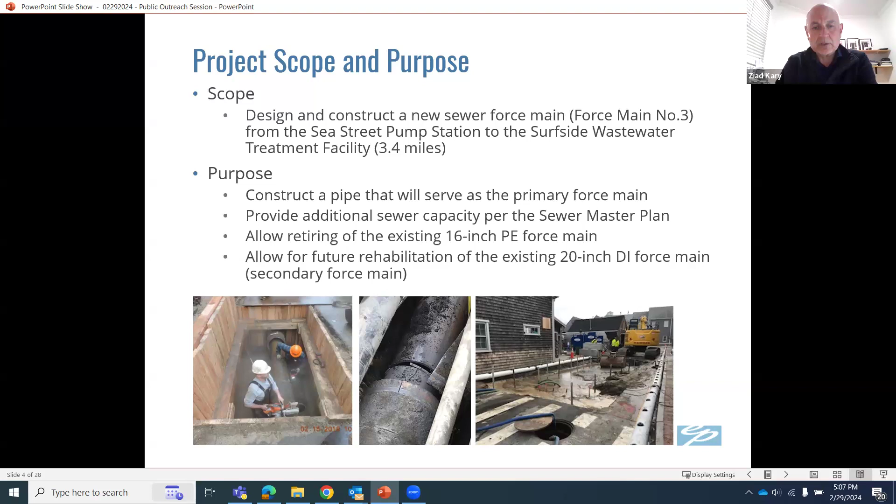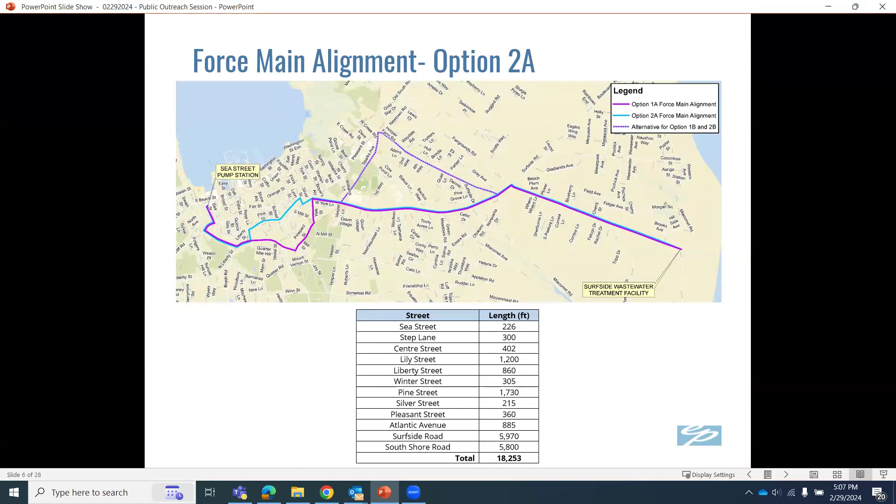So the alignment - we did an alternative analysis. We worked with the town and the owner's project manager, and we looked into various routes along the alignment. The intent was always to connect point A to point B - point A being the Sea Street pumping station, and point B the wastewater treatment plant on South Shore Road.

So there are multiple ways you could connect the dots in between, but the intent was to maximize the effort and replace all aging infrastructure along the alignment. We considered the shortest alignment, and of course we looked at the economics of it too.

Along the chosen route, which started at Sea Street and went up Step Lane, took a right on Centre, Lily Street, Liberty Street, and then Winter, Pine. We crossed Main Street, and then we get into Pine, Silver, Pleasant, Atlantic. It's all listed in that table below here.

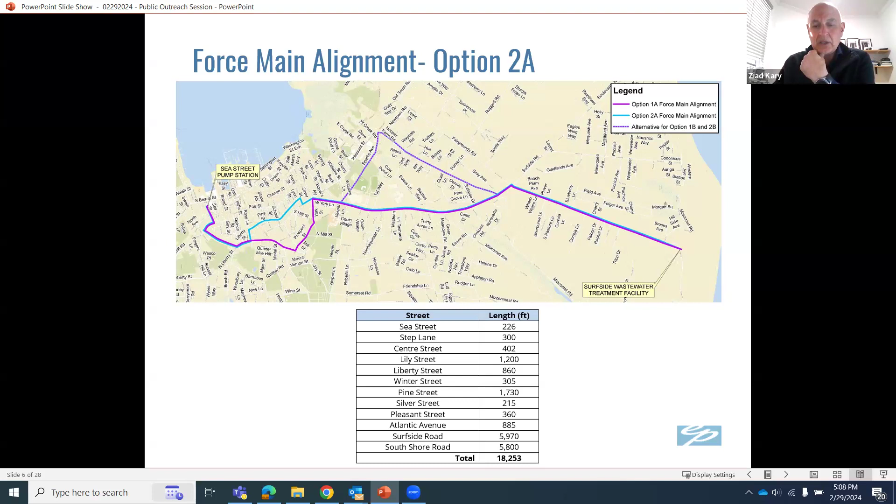But the Board of Selectmen and everybody on board during the alternative analyses portion decided to go with this option because it made the most sense. It took advantage of aging infrastructure along the way, and it was feasible and economical compared to the other ones. Again, it was the shortest route from point A to point B. There's no impact to wetlands or anything like that.

We also had to take into consideration the existing 20-inch force main, and we wanted to provide a way to cross-connect the new force main to the old one to be able to take a segment or segments of that force main for operation and maintenance purposes.

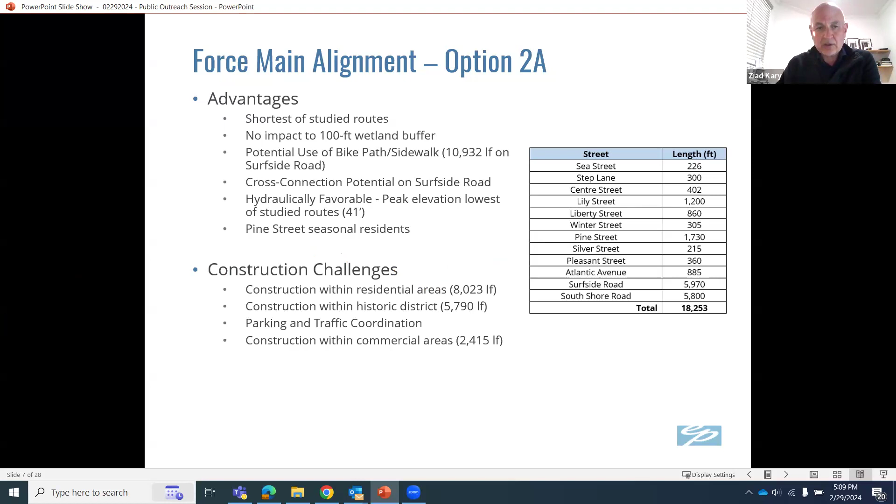Every single route presented its own set of challenges, but the Board of Selectmen approved this back in 2021, and we proceeded with this design, and here we are in year 2 of construction. Again, as I mentioned early on, the intent was to address aging infrastructure along the way, primarily water mains, gravity sewer, some drainage along the way that needed to be upgraded if it was in the way of the force main, but primarily to take care of the water and wastewater infrastructure.

So in summary, what was completed to date, this is the entire route from the Sea Street pump station along the streets that I just mentioned, all the way to the wastewater treatment plant. There's approximately 20,000 linear feet.

Anything highlighted in lime green has been completed, and what's left is the blue portion. On the right side where my mouse is hovering, it's the connection at the wastewater treatment plant on South Shore Road. And then what's left here down below is Liberty Street, Winter, crossing Main, and then Pine and Silver Street, adjacent to the parking lot on Silver Street.

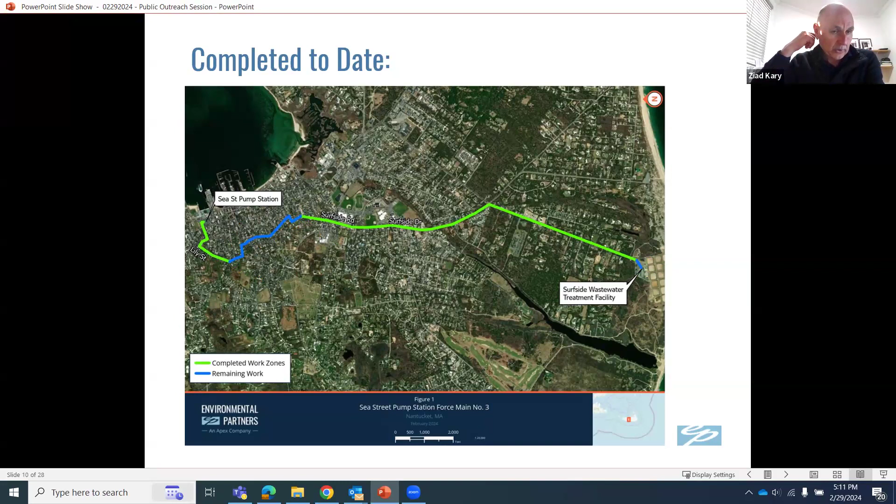The force main itself was designed to be a combination 20-inch to 24-inch. It switches to 24-inch beyond the Surfside sewer pumping station, the one that just recently completed, and it's made of robust schedule DR18 PVC pipe.

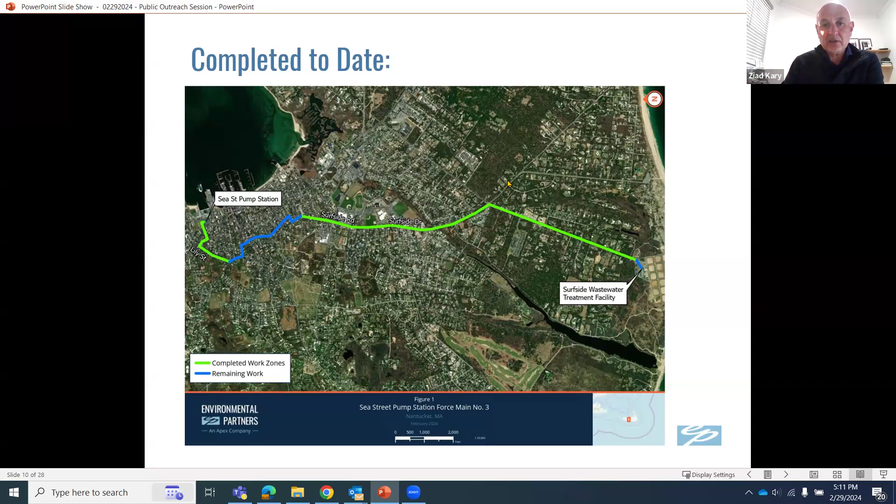Again, in summary here, the 24-inch sewer force main from Surfside to the treatment plant is 100% complete. That is really half of Surfside Road and all of South Shore Road. About 62% of the 20-inch has been completed to date, from Sea Street, Step Lane, Centre, Lily, and then Atlantic Ave and Surfside on the opposite side of the island. And here we are today on Lily Street, on Liberty Street, completing that remainder of the sewer force main.

The 70% of the valves and the access control structures have been put in place, and 40% of the gravity sewer and the water main. It seems like a lot's been done. The contractor's been very diligent about doing this work, considering the short construction duration here.

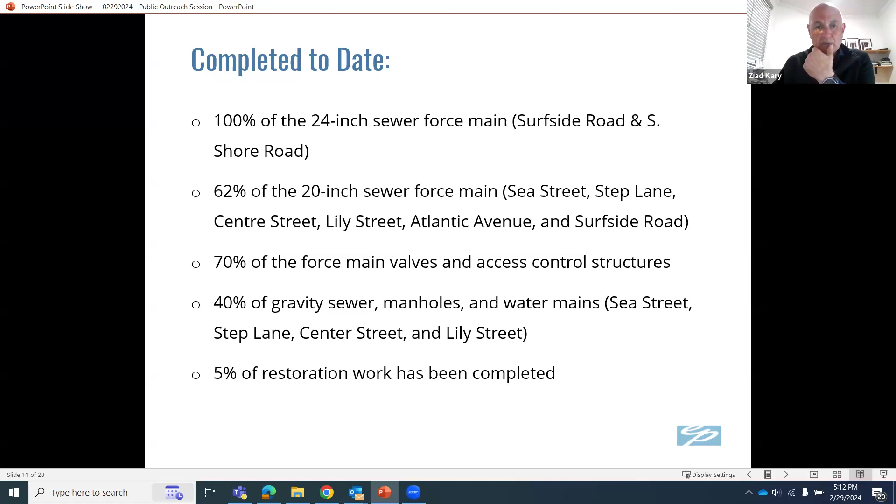Because obviously we can't work in the summertime, and then we come back in mid-September, and then we work all the way through Memorial Day. Restoration is a very large piece of this project. The pipeline is nothing easy about it, but then of course the restoration is going to be time consuming. And to date, we only have about maybe less than 5% of the restoration piece completed, meaning paving, sidewalk, curbing, brickwork, cobblestone, Belgian block, and any loam and seed that is required along the alignment.

So the winter spring construction on Liberty Street, basically what we have, we started about a week ago on the 22nd of February, and it's going through May 31st, 2024. By May 31st, we intend to be out of the alignment, out of the roadway, complete with the pipeline, and we're going to do temporary restoration before we come back in the fall, in September 2024.

In summary, we have about 875 feet of 20-inch PVC sewer on Liberty. A lot of it's going to be deep. It's going to be time consuming, and it could be slow going at times, but we're going to make every effort to get to that point, hopefully by the end of construction season. There's about 650 feet of PVC gravity sewer and associated services along the way, left and right of the roadway, and somewhere around 875 linear feet of 6-inch DI water main.

Today, you see that the contractor is stringing the bypass, a water main bypass. That's the first thing that goes on the road there, and they rip out the old water main, put in a new one, test it, commission it, and then we'll remove the bypass when it's complete.

Typical working hours are usually between 7 a.m. and 5 p.m. Oftentimes, if we run into trouble, we tend to work a little bit late. Now that the days are getting longer, sometimes the crew loses a day due to weather, whether it's snow, rain, or maybe the boats are not running. So sometimes they're trying to make it up during the week, but oftentimes you see that the contractor's working between 7 and 5 p.m.

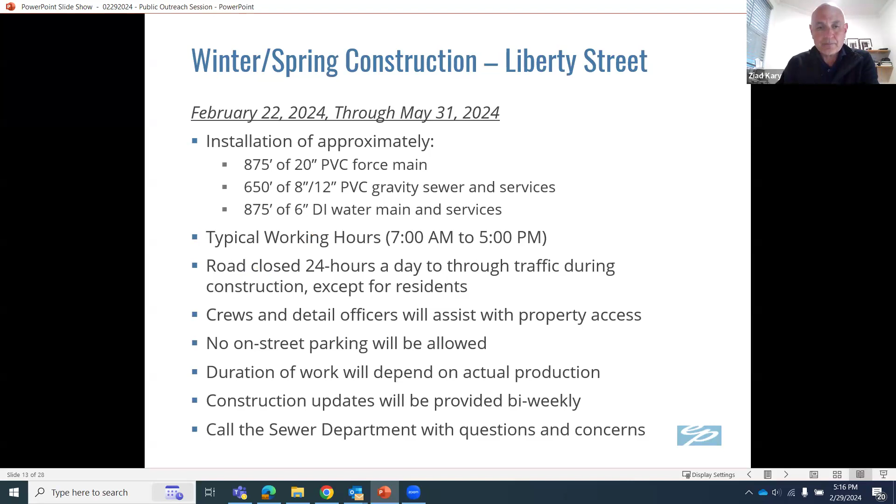Again, this is from Thursday the 22nd. The approximate duration of this will be about 8 weeks, hopefully a little bit less than that, but let's plan on 8 weeks. This figure shows a 24-hour full closure except for residents. Again, construction hours are between 7 and 5 p.m.

As we did in the downtown piece, all the delivery trucks, whether it's propane or any heating deliveries, have always been coordinated. Now we know the drill, the suppliers know the drill. They'll contact us and then we'll make arrangements. Nobody was left off in all of downtown, and there'll be no different here moving forward.

So here's the number for the sewer department. If you have any questions, any complaints, any issues that need immediate assistance, it's extension 7800, and this will be posted also on the project website.

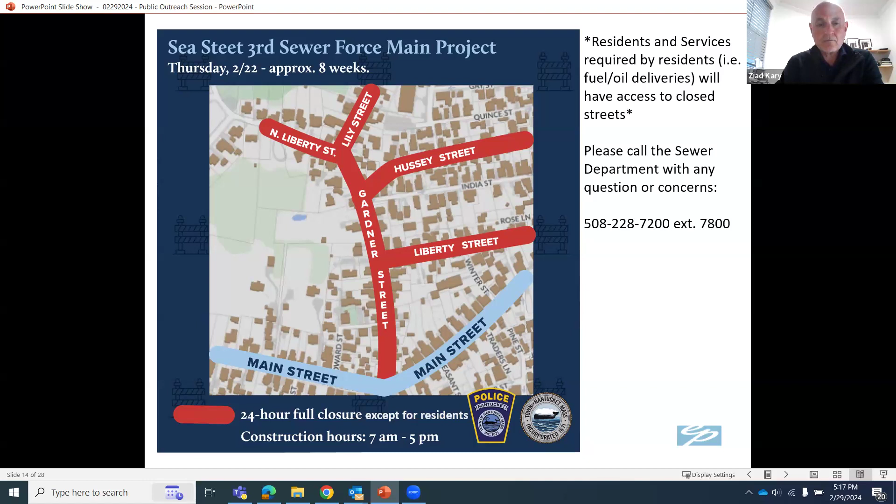This figure here shows, if you look at anything that's dashed here, represents the work area, which in this instance is on Liberty Street. Anything that is in lime green will be the traffic pattern, and the hashed area would be the road closure. So for example, if you live within this stretch and you can't really continue down on Liberty Street, you could come up and find your way around the work zone. If you live on this portion of Liberty Street and can't really get through there, you talk to the flagger, the policeman, or the crew members, and they'll let you go in the opposite direction to exit the work zone.

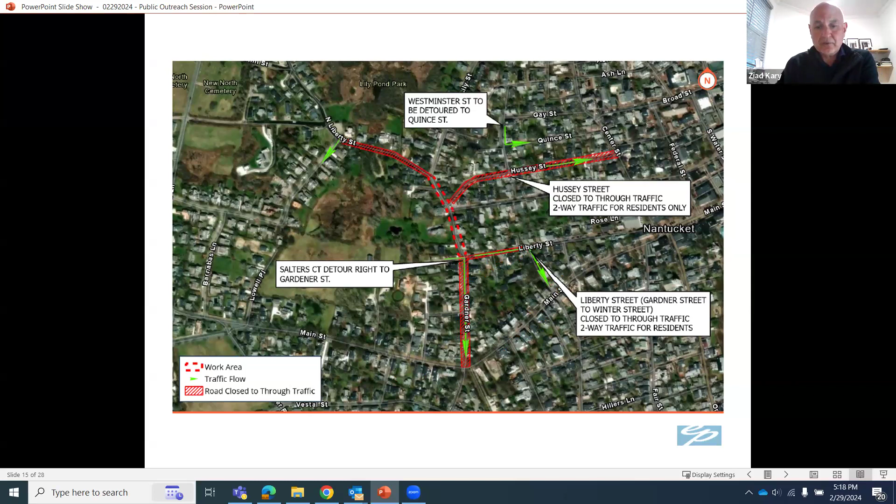There'll be plenty of construction signage. Like I said, people are on site 7 to 5 at a minimum, and you could feel free to roll your window down, talk to the crews, the flagmen, the policemen, and everybody's happy to assist.

Same thing, same condition, Liberty Street at Gardner and North Liberty at Woodbury Lane. The signs will be there, and then folks will be there to assist as well.

So the expectation is sometimes you're going to see people walking around doing some construction photographs and videos, and it's really nothing but to make sure that we're documenting existing conditions of surface features, foundations, walls, anything adjacent to the excavation, just to make sure that we're not making the situation any worse than it was. This is a requirement of the contract, and it will be documented and made available.

They will be installing some monitoring points, whether it's a crack gauge or a settlement point, to make sure that nothing is settling or moving as a result of construction. They'll be doing some layout and survey, painting the pavement, putting some PK nails, line and grade, that would help them assist the contractor with the installation of the pipeline and making sure that the pipe is installed in accordance with the contract document.

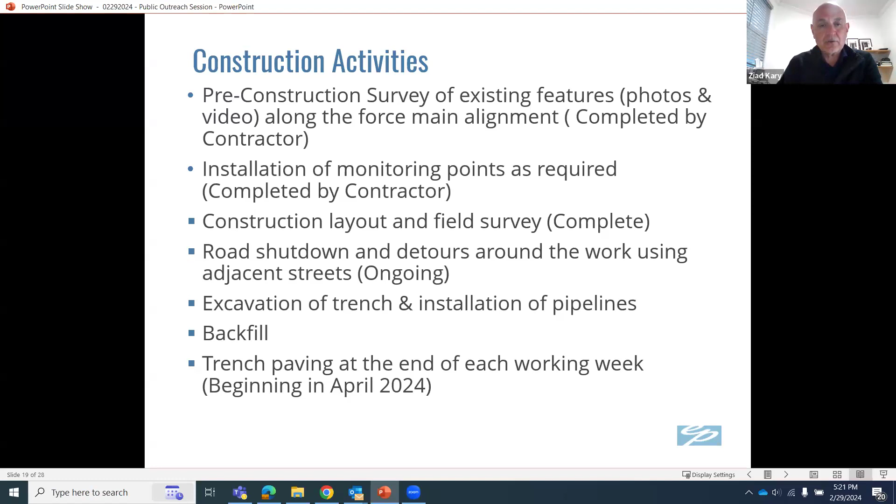We talked about the crack gauges and the monitors - this is what they look like. This is a crack gauge. Basically, if you have an existing crack in the foundation, this is just a sample photo. If you have a foundation wall, a brick wall, any surface feature adjacent to the excavation, we usually put a crack gauge on it to make sure that the construction is not impacting the crack in the foundation, an existing crack, or any movement for that matter.

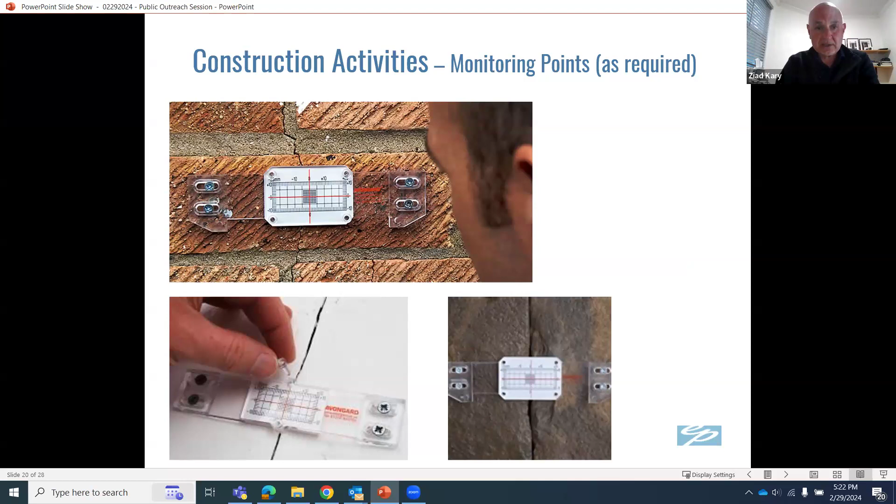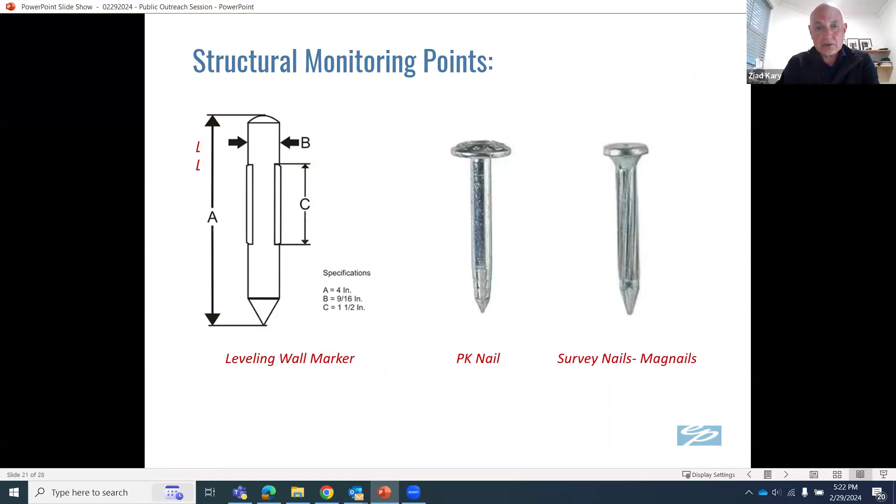Same thing with a PK nail that measures vertical displacement or movement of anything as a result of construction. Again, these instruments are intended to protect the homeowner and to make sure that there's no damage being done as a result of construction.

These photos have been taken from the Center Street project last year. Again, typical construction would be you rip up the pavement, remove any Belgian block, cobbles, or anything that may exist below the roadway. If the sidewalks are impacted, the brickwork would be removed and stacked, and so is the granite curbing.

This will be followed by trench excavation. Some of the pipeline is fairly deep, sometimes about 10 or 12 feet deep, so it requires a trench box and then some supported excavation.

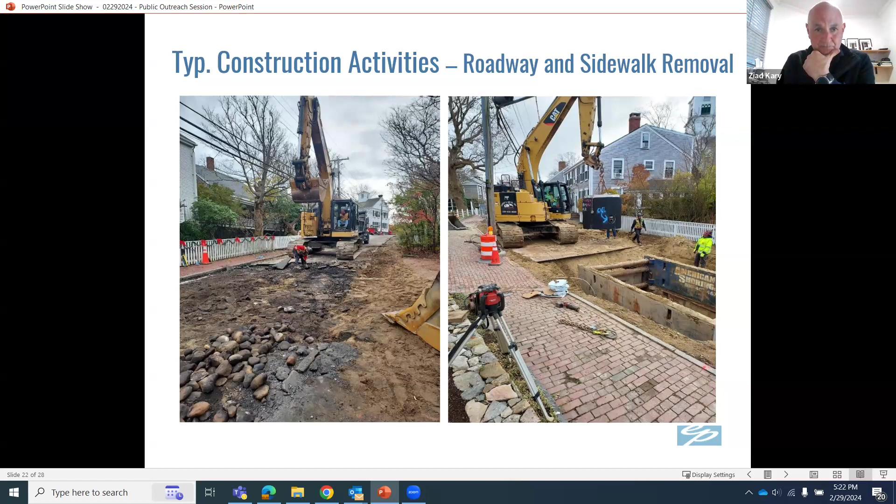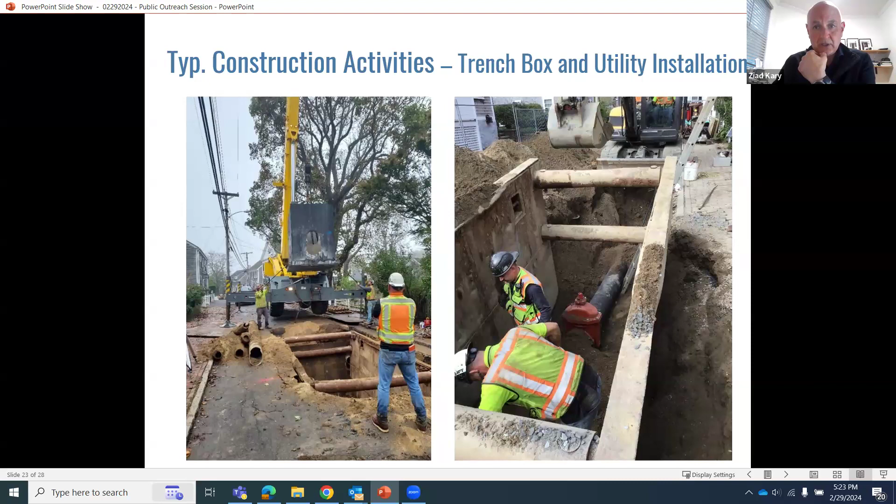This would be followed by pipeline construction. In this case, on the right, that's a water main replacement project along the way. And the photo on the left, you can see the old pipe is taken out of the ground. New pipe will be installed, with backfill and compaction.

This is the pipeline on the left side - that's the sewer force main on Surfside. There is a crushed stone envelope to protect the pipe, and then backfill, compaction, and paving. Again, the plant opens up in April this year, so we're not going to see any paving until April. But again, before we leave the site by Memorial Day, everything will be paved, temporary paved.

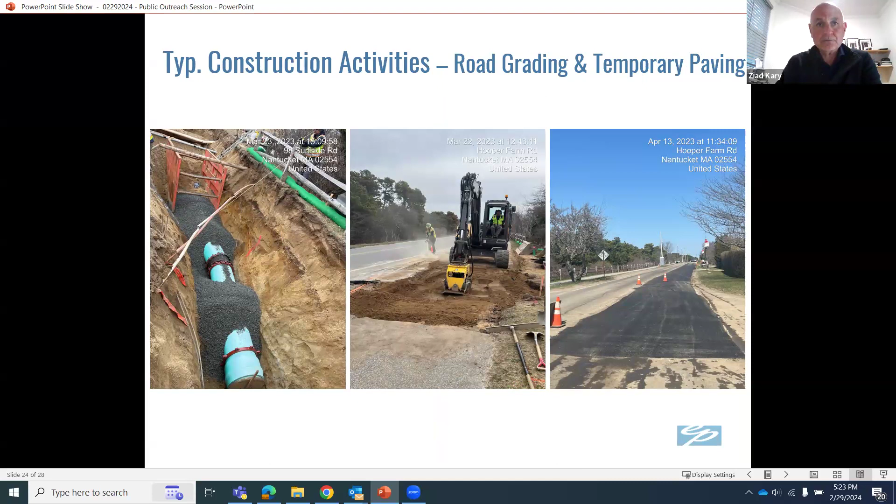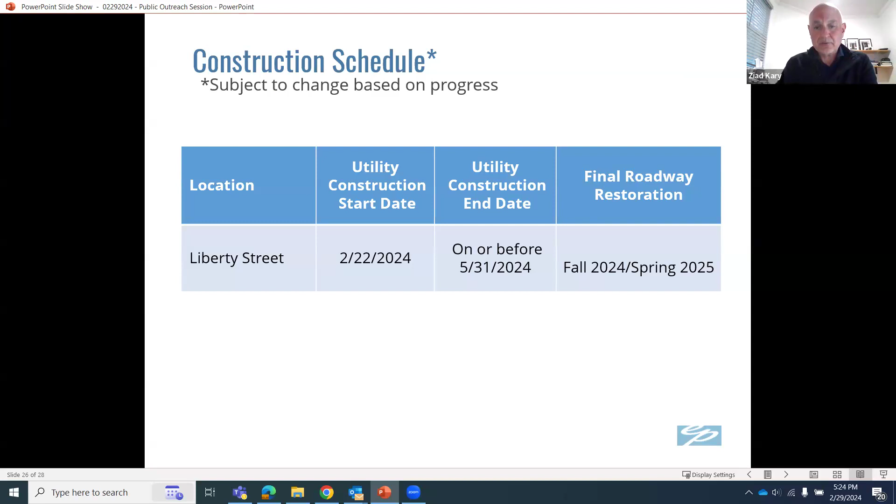Once again, questions, comments, concerns - call the sewer department and they always get a hold of us. Either Francesca, Lexi, or myself, we always return the calls. We keep track of who's calling and the nature of the complaint, or if you have any concerns whatsoever, whether it's delivery, somebody needs to get in and out of their house, anything related to construction, please feel free to call, and we'll be more than happy to return the call for you.

So with that, we'll be happy to take questions. You want us to raise hands? Feel free - I think Lucy Dillon was ready to go first, if you don't mind.

So one thing that's really been bothering me is the unnecessary truck idling, which I understand is not legal. We've had to say something once or twice already today. But I do have other questions.

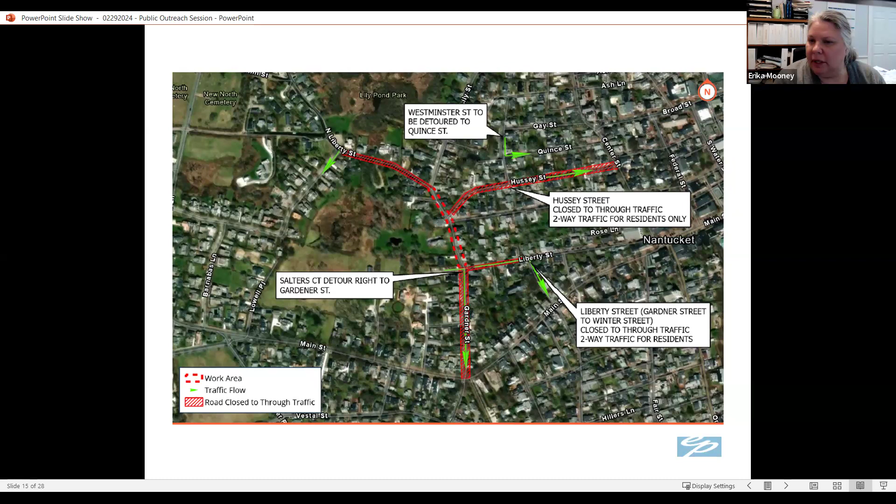So India is not on our map, and I guess we're going to need to consider how people get access to that. Yeah, because it's one way off of Gardner. Yeah, and I think there aren't many residents there at the moment, but...

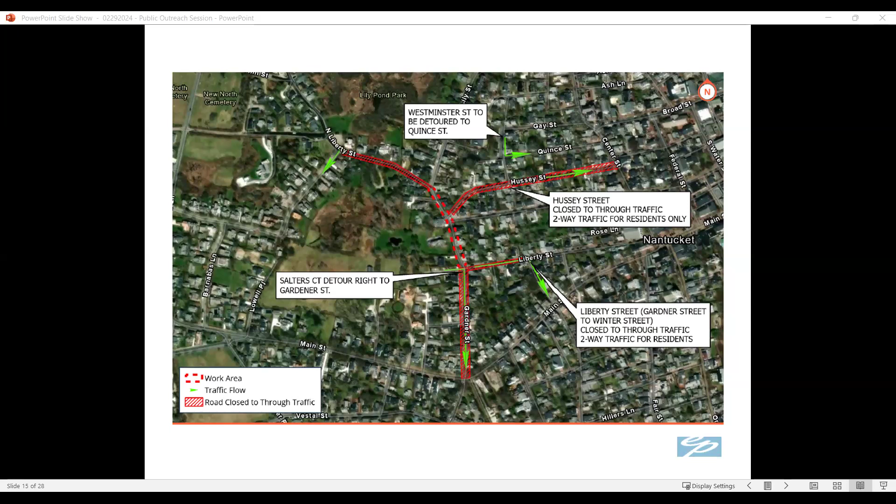Even though we're closed, it's a pretty active place year round, and today was a perfect example of that. Myself, as well as several volunteers, could come, and once they arrived, they said, 'Oh, I had to park on Main Street, I hope I don't get a ticket.' Mary, is your parking lot in the back off of Hussey?

We have one behind the shop on Hussey, it fits four spots, but then they would have to exit from there and go somewhere. Well, they would go back Hussey the other way towards center, the wrong way. And then have a full driveway on the side of the shop, which they'd have to access the wrong way from Center Street. So it's just with Gardner being closed, it's eliminating our access going the right direction.

I'm sorry, I'm outside. If my audio is wobbly, I apologize. You're fine, okay.

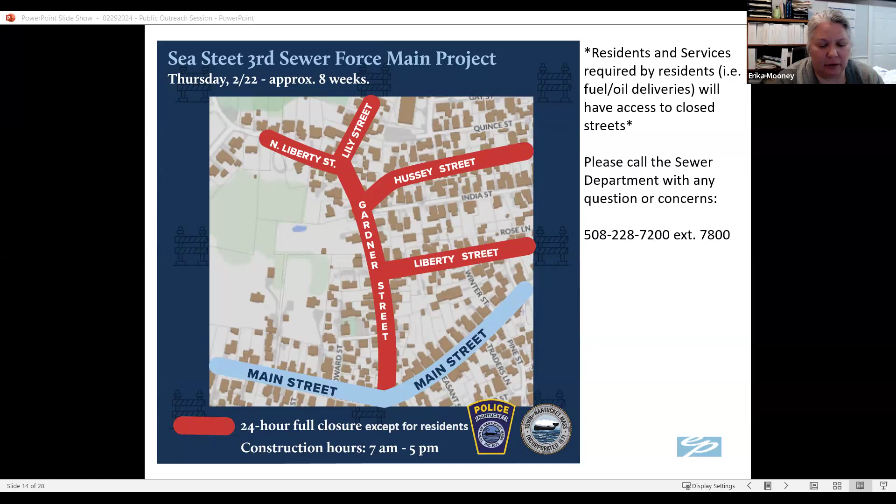So I could connect with whomever could help me on this offline, because I'm sure other people have questions, but I just want to get some answers for the volunteers, and certainly if it goes beyond opening day, that'll be a concern for us.

Okay, we'll follow up with you, Mary. I've got your contact info. Yes, you do. Thank you, Erika. Thank you, Mary.

Just quickly, if Lucy is still on, are you gonna be around the house tomorrow, Lucy? If I can round up some sandbags here quickly to get them down to you, because I know next week is gonna be pretty wet.

Yeah, I'm here all the time, unless I'm going to the hospital for a doctor's appointment or something. But I'll be here. Just come to the kitchen door, okay, and knock, and one of my health aides will be there, and you can come in if you take your shoes off.

Okay, no, I'm gonna try to get them sandbags as soon as possible. Great, thank you. Thanks, David. Anytime after 10 o'clock would be great. Okay, perfect, thank you. Thanks, Lucy, David.